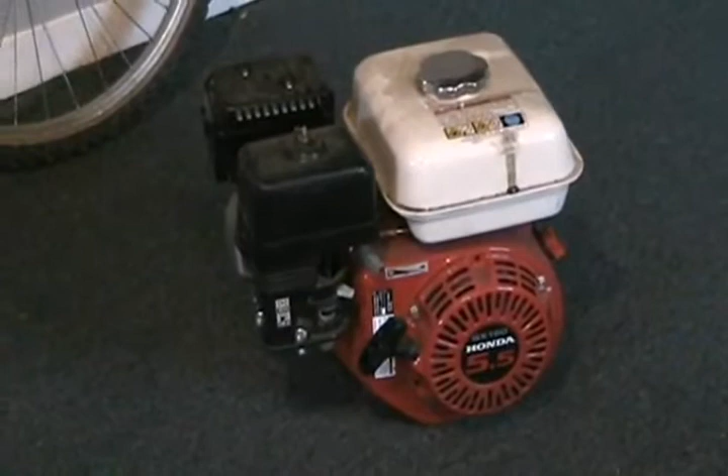If you had a go-kart with an ordinary lawnmower type engine like this, and the go-kart weighed say about 200 pounds and you weighed about 150 pounds, so your total weight was 350 pounds, and you have the friction and resistance of 4 wheels, and of course a go-kart has more air resistance than a bicycle with a person on it. Well, about 8 horsepower will move your go-kart, if you calculate everything out right, about 50 miles per hour. That's all the power it's got. That's all it can do.

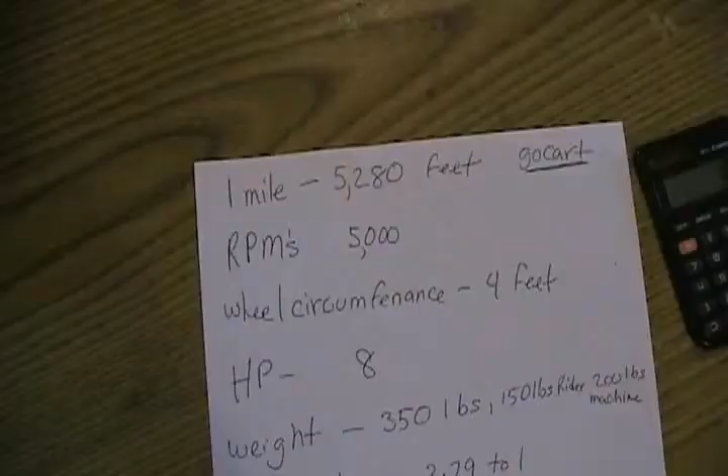Since most of the people watching me are Americans, I'm going to give this information to you in miles per hour, the old-fashioned not metric system. So here's some things you'd have to think about if you wanted to make a go-kart and figure out the gear ratios. Well, first information you got to know is a mile is 5,280 feet. The average RPM of a motor like that, maxing out at redline, is about 5,000 RPM.

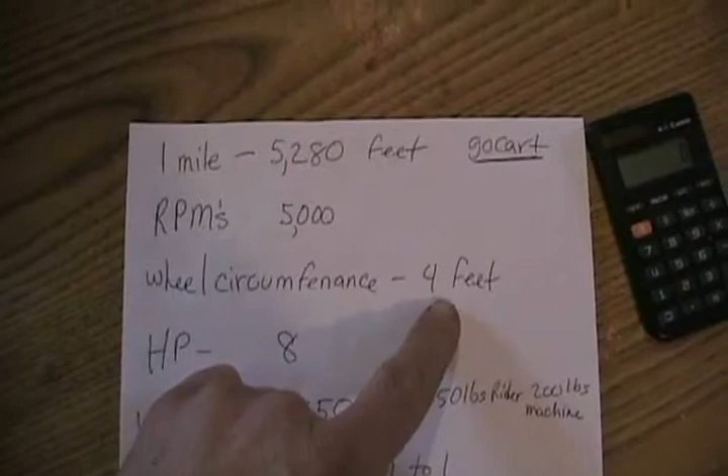Well, the wheel I chose to make an imaginary go-kart with, I borrowed from my friend John that came off my go-kart. Well, I took my measuring tape and I measured all the way around that wheel, and the wheel turned out to be about 4 feet around, 48 inches, like so. I'm imagining that motor is 8 horsepower. Like I said, I'm imagining the total weight of the moving vehicle is 350 pounds.

And I'd come up with a gear ratio, just for example, of 3.79 to 1 if I wanted that go-kart to go 60 miles per hour. But I really don't think that engine would have enough power to make it go 60 miles an hour, but I know it would have enough power to go 50 miles an hour, so I'll show you how I came up with these calculations and that final answer.

Look at my kitty enjoying that nip on the floor that I gave her. My famous catnip from Davidsfarm.

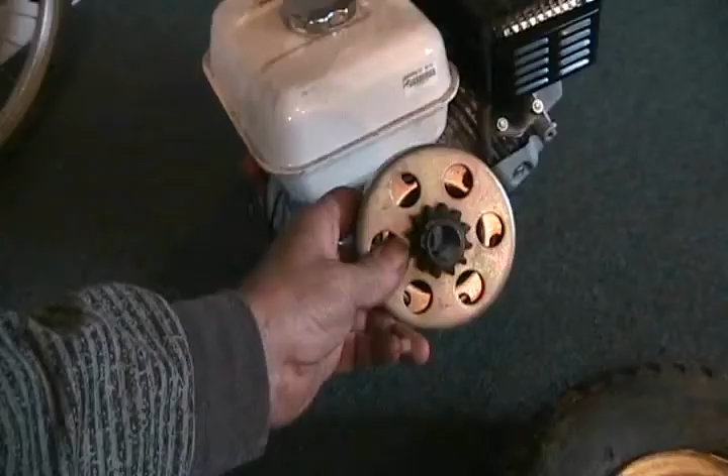But anyways, so if that motor were 8 horsepower, and that 350 pound go-kart with somebody in it had a wheel that size, well, it could probably do 50 miles per hour. Now if I put that clutch on it, well, I've already measured the sprocket on that clutch, and its total diameter is 1.75 inches. So the engine would have to spin 3.79 times to make that wheel turn 1 rotation

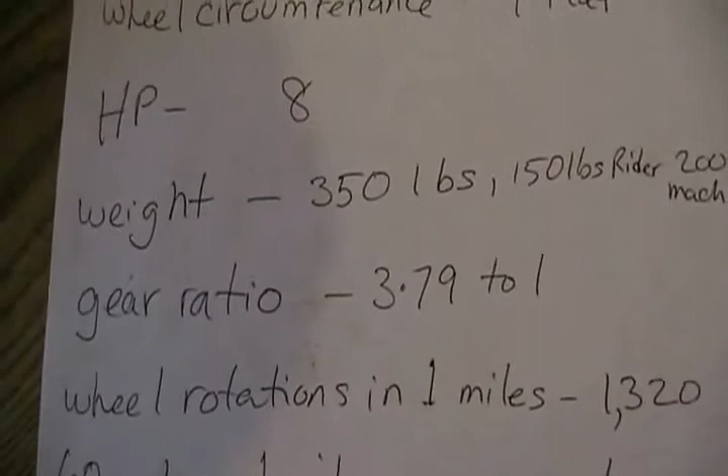to get that top speed, if this engine could move it at 100 kilometers an hour or 60 miles per hour. Since that clutch is 1.75 inches in diameter, that means to get this ratio, 3.79 to 1, the sprocket on the axle to drive that wheel would have to be 6.63 inches for 60 miles per hour. Here's how I figured that out.

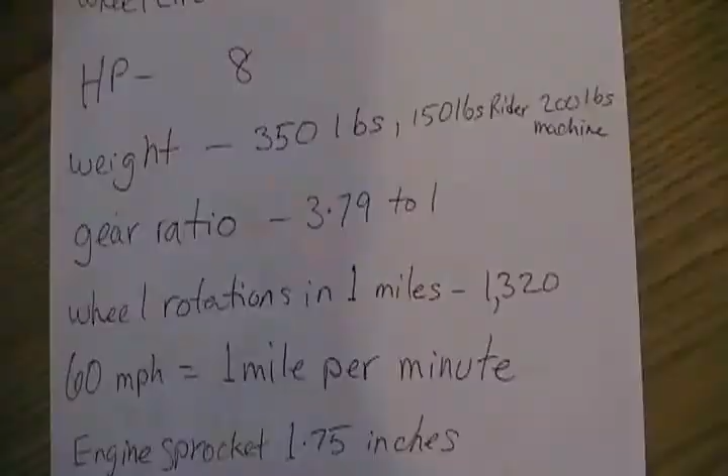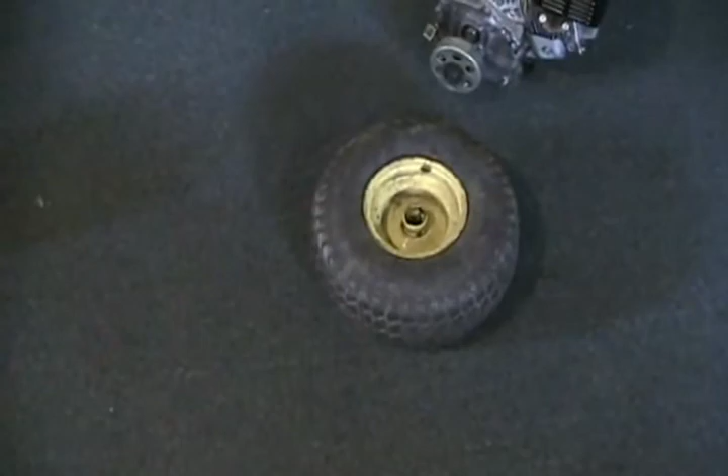So what I did was, since that wheel was 4 feet around, I divided 4 feet into 5,280 feet, and that came out to a number of 1,320. So that means if you just rolled that wheel on the road, in 1 mile it would rotate 1,320 times. Next thing to remember is 60 miles per hour equals 1 mile per minute that you're driving.

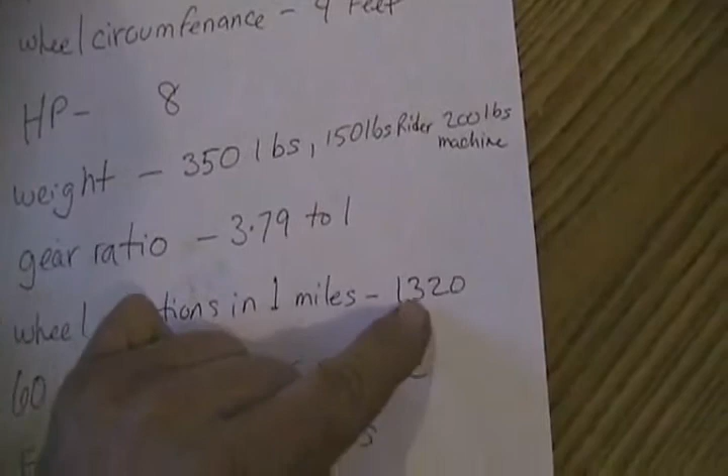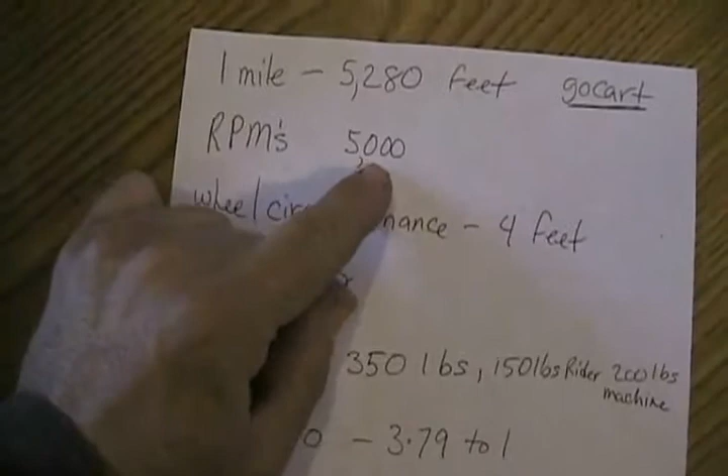If this imaginary go-kart could do 60 miles per hour, we would have it redlining at 5,000 RPMs, and at the same time, at 60 miles per hour, the wheels would be rotating at 1,320 revolutions per minute. So if you divide 1,320 into 5,000, you will get an answer of 3.79. That means 1,320 fits into there 3.79 times. So that's how I got that ratio, 3.79 to 1.

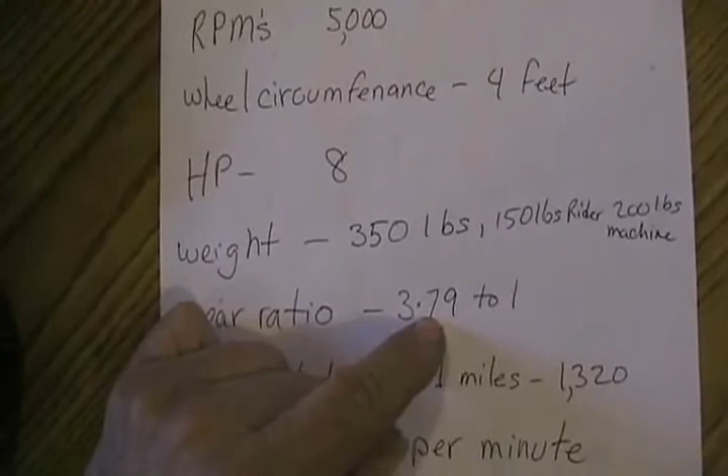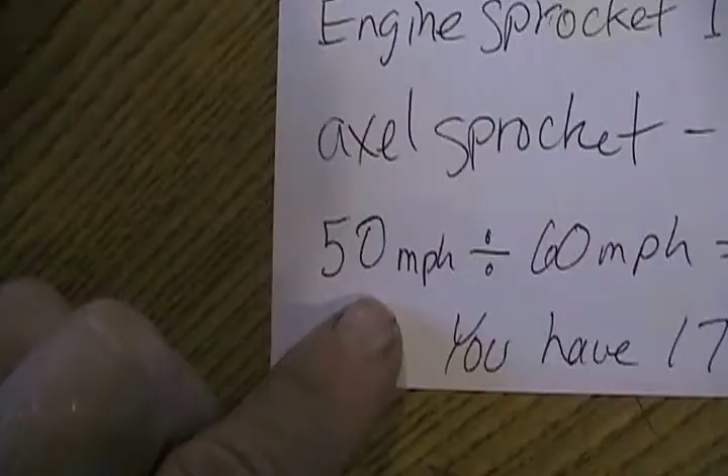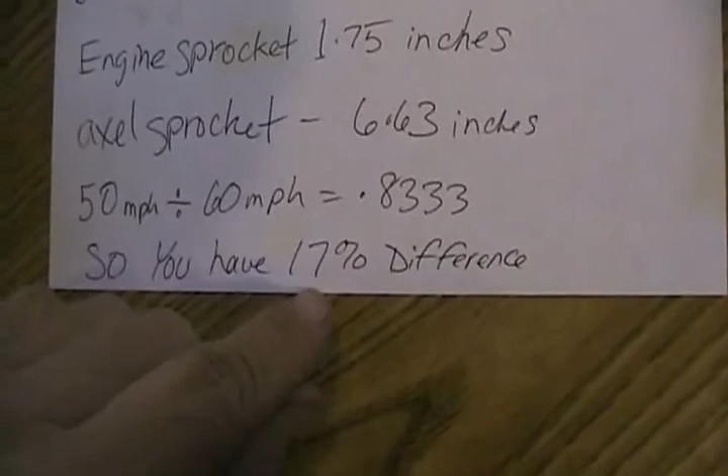So this is how I calculated the new calculation, so that the engine would still redline at 5,000 RPM, but when the go-kart is at 50 miles per hour. So what I did, I wrote down 50 miles per hour, divided it by 60, and that gave me a number of 0.833. So I took 0.833 and subtracted that from 1, a whole number. I ended up with about 17% difference to make 50 miles per hour.

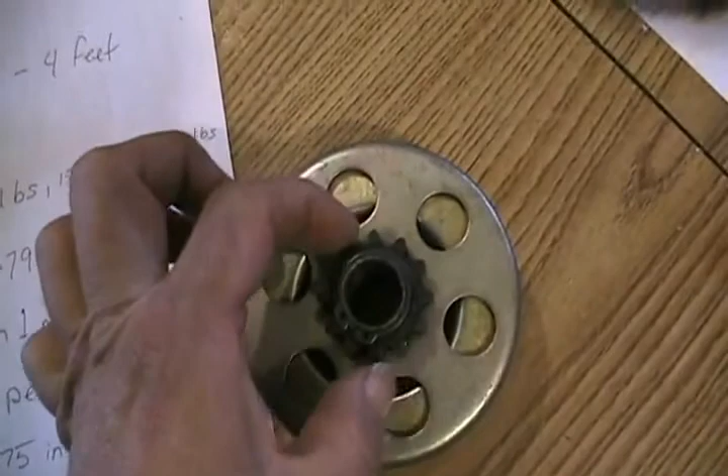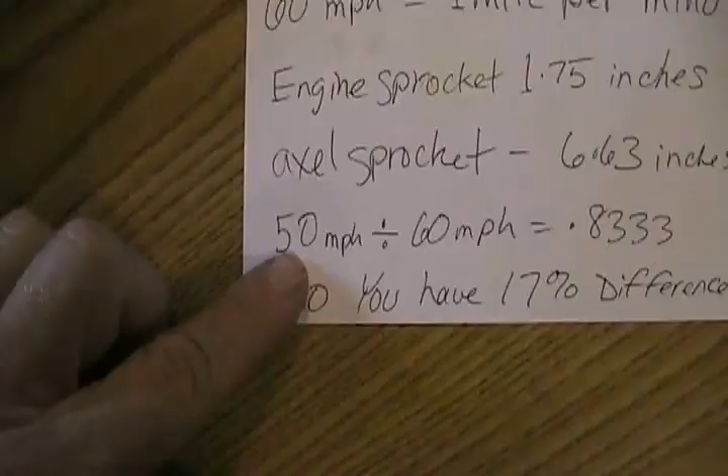Now, since I already know that the diameter of this is 1.75 inches, I multiplied that number times that number, and that gave me this number, 6.63 inches, which would be the size of the axle sprocket if the go-kart could do 100 kilometers an hour or 60 miles per hour. But like I said, since the go-kart will likely only do 50 miles per hour, we want to find out the new sprocket size that would be bigger to cause the engine to still redline at 5,000 RPM, but do that at 50 miles per hour.

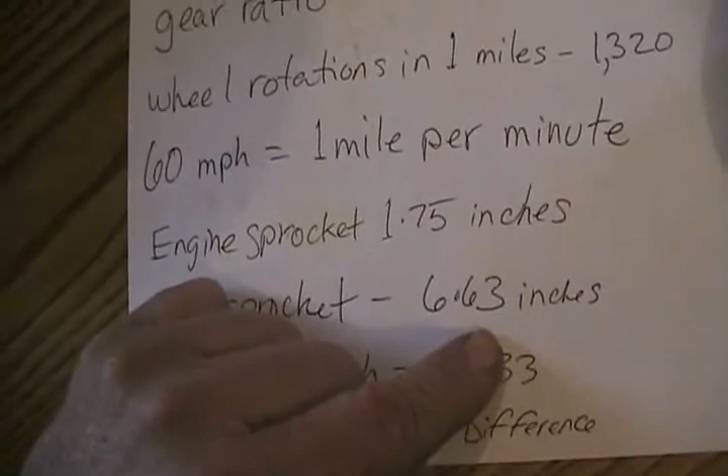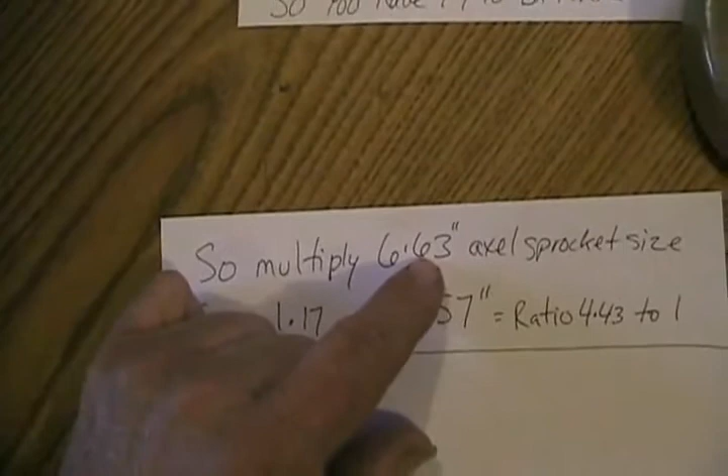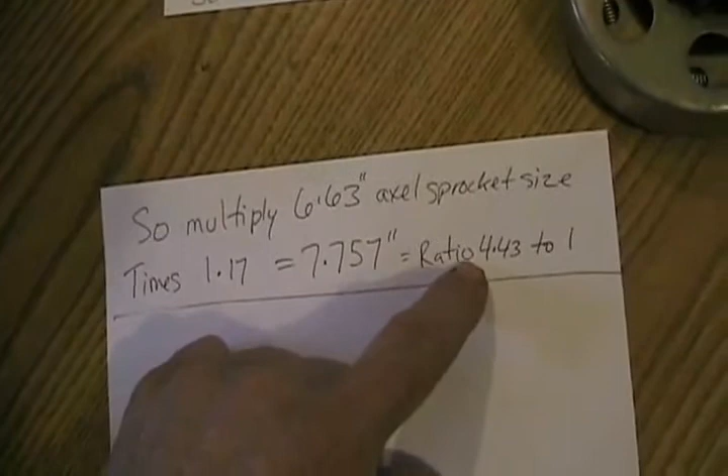So 6.63 inches. I want that sprocket to be 17% bigger. So I multiplied 6.63 times 1.17, and that came out to 7.757 for a new ratio of 4.43 to 1. That'll make that go-kart with that sprocket and that tire redline at 5,000 RPM at 50 miles per hour, which is just about right, if that were 8 horsepower.

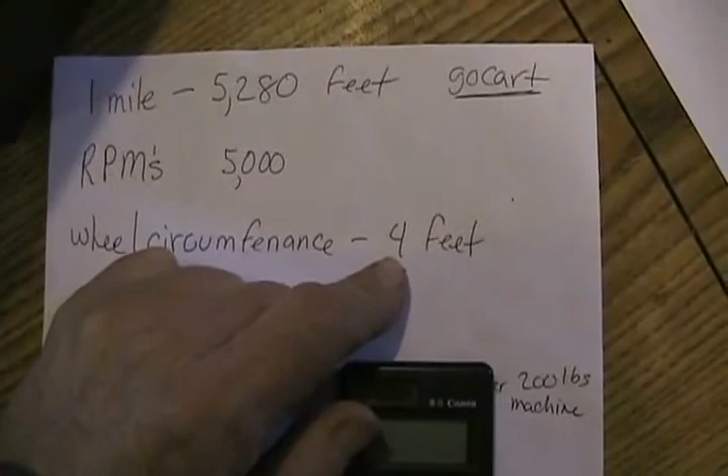Let's imagine the circumference of your wheel didn't work out so simply at 4 feet. What if it was 3 feet 8 inches? Well, calculators don't work in fractions, so you have to use decimal places to calculate things. So if that said 3 feet 8 inches, well, that's not 3.8 feet. There are 12 inches in a foot, and 8 inches is actually 0.666 of a foot. So if that wheel were 3 feet 8 inches around, that would equal 3.666 feet on your calculator when you're doing the calculations.